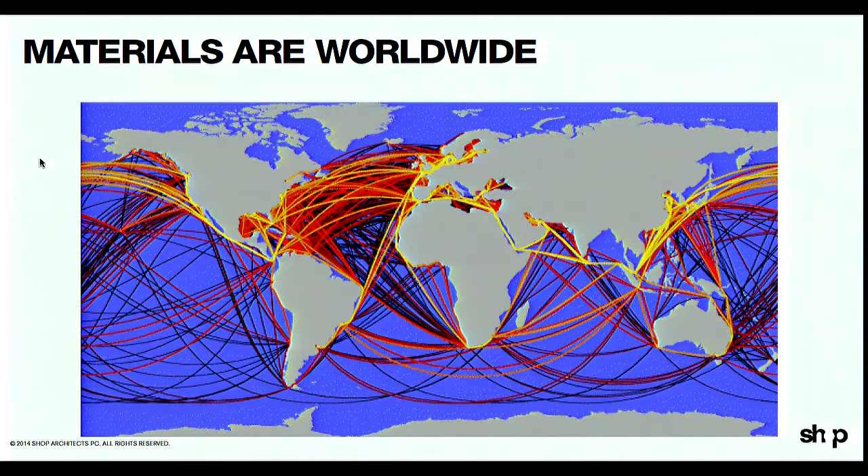This is a map of the shipping routes and frequencies around the world. We are hyper-connected through material processes around the world, but shipping is slow, expensive, and has a lot of emissions associated with it. At the same time, if we look at a map of our undersea cables that connect us via the World Wide Web, we're hyper-connected in this way too, and there's almost no cost associated with shipping a piece of information from New York to India.

So what does that allow us to do with those opportunities? It almost requires us, or begs us, to do more with less. How can we use information intelligently to prefabricate, to plan for doing unique installations, unique construction methodologies by tightly planning what we actually are shipping and tightly orchestrating what we are designing.

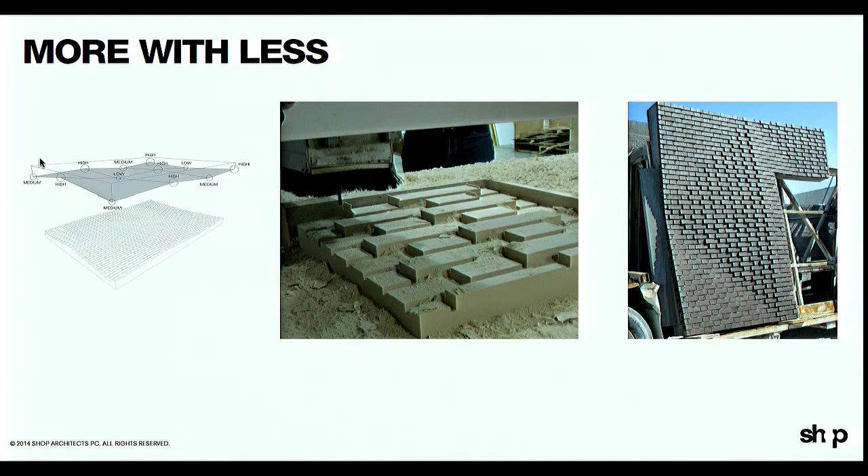This is a couple of images from a project we did in New York, where we looked at how we could come up with a 21st century application for traditional brick by using 3D modeling software to mill out forms, and then this is nothing but brick on a cement backup wall, and hopefully providing a visual interest, a new way of looking at traditional materials through this use of prefabrication. I'm going to touch briefly on the Barclays Center here in Brooklyn.

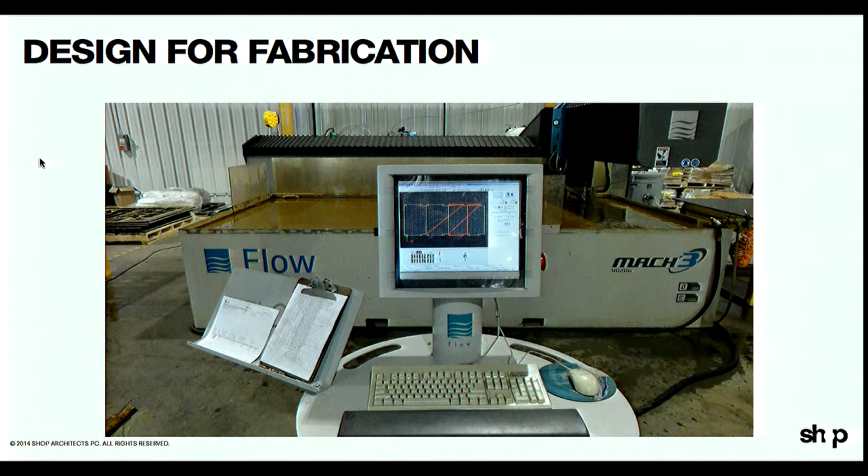Again, using this idea that moving information is inexpensive, moving prefabricated materials is expensive. This is an image of the CNC water jet in Indianapolis where panels were fabricated. This computer was programmed in our offices in Manhattan, and the information for every cut file was sent to Indianapolis. There were 12,000 unique panels on this project. Each one needed a different CNC cut file to cut it and then bend it.

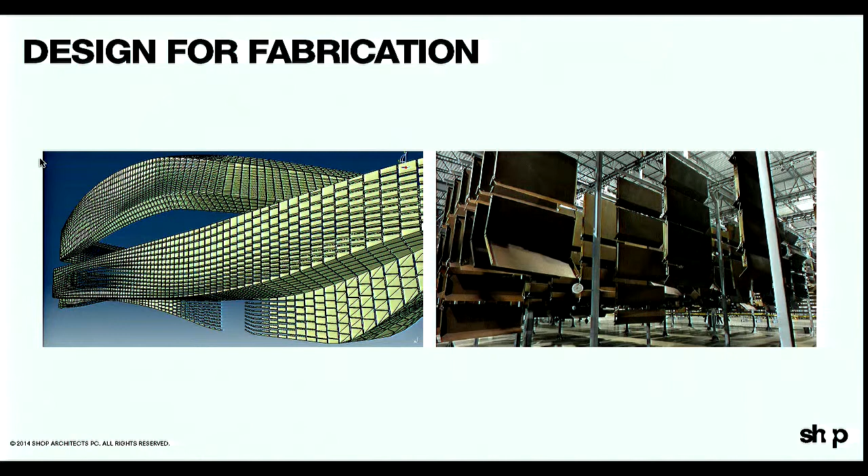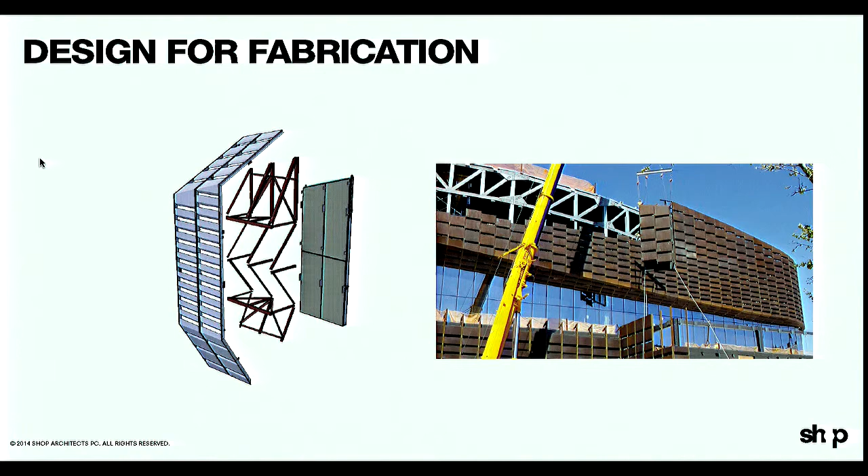And this is an image on the right of the panels being weathered in Indianapolis. The panels were then unitized to the enclosure system. And in this creation of 952 mega panels, we reached a really efficient unitization between enclosure and cladding and also shipment. And these were shipped to the site in Brooklyn and erected as you see there, coming up with a very unique visual interest moment.

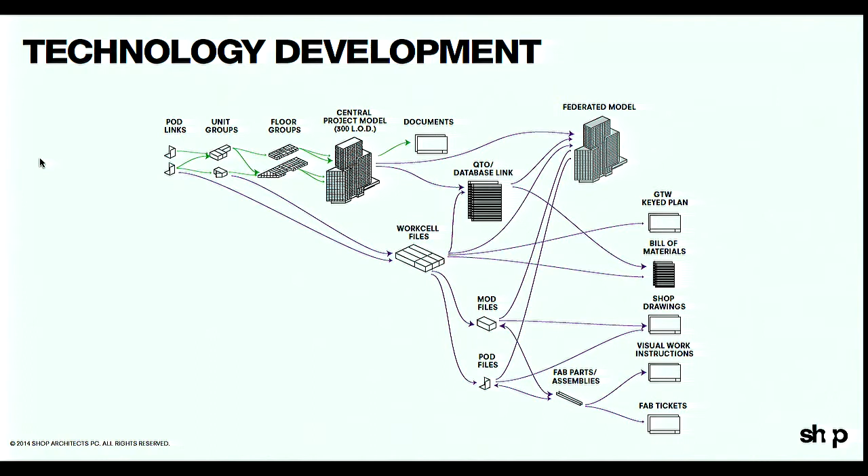So as Jeffrey introduced, there's a couple of drivers that are inherent to this system. Technology development: orchestrating information across multiple design teams, from the building information model to the instructions that the worker on the site actually uses, and how all that information is orchestrated is going through rapid technological development right now and is certainly impacting the way that we design and construct.

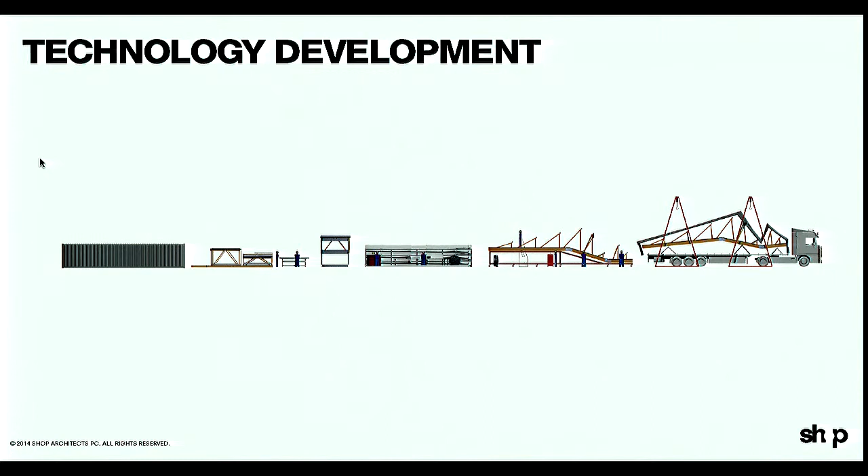At the same time that we're trying to coordinate massive amounts of information and plan it, we are also needing to coordinate material, the physical reality of what we're building. And if you are able to coordinate material, people, and information at the right time, you have a successful building project. If not, you have a lot of chaos and extended delays on your construction site. And what we're really talking about is building a very complex database of information that allows us to plan and coordinate this orchestra. And we've been working with technology companies to help innovate what this database is. This is an example of linking all different parts of the model to that information.

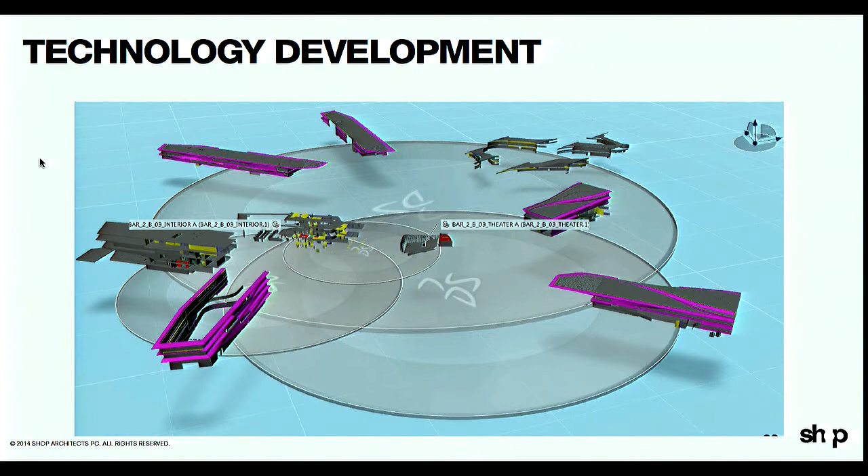But you can't have just technological advances without organizational advances as well. And very traditional to our industry is a hard divide between the design side and the construction side. It does not work like this integrated database that we're trying to drive to. It works as a barrier between them. So we need to take contractual issues and catch them up to the technology advances that we're making, and bring people together in the same way that we're trying to bring materials and information together.

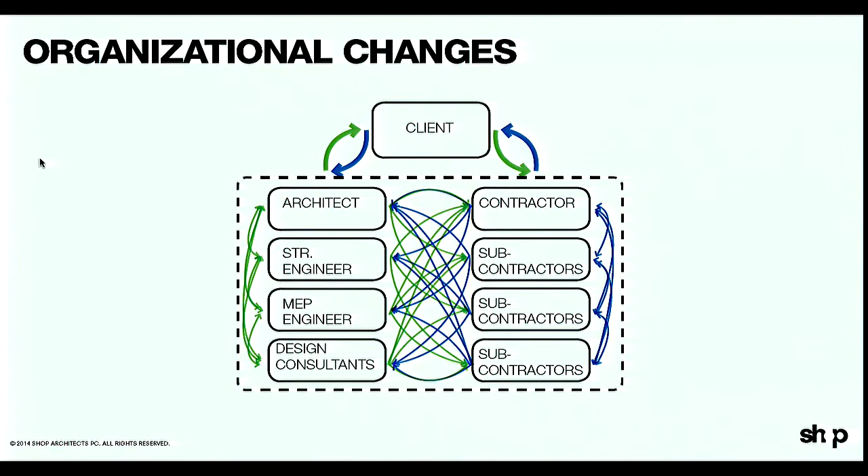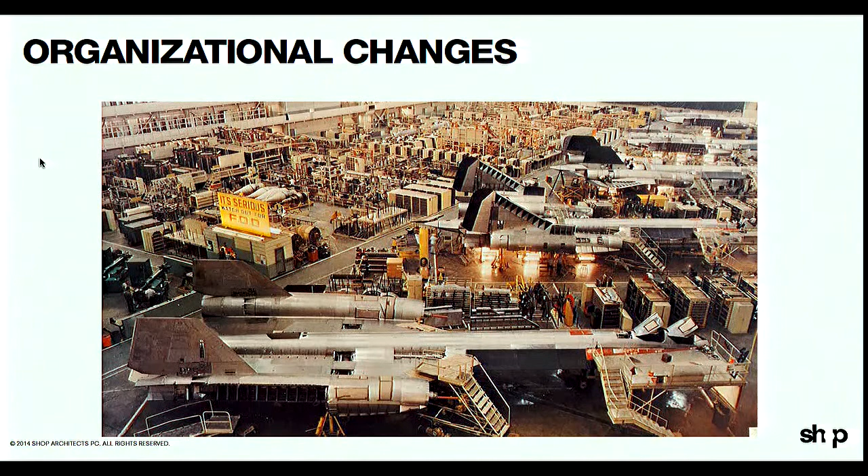One of our office's favorite examples of this is Skunk Works from Lockheed Martin, which was, we're going to put a cross-disciplinary team in a warehouse for 8 months, and they're going to redesign the jet engine. And if we can take lessons like that of putting people together in a room, and that was in the 50s, certainly we can do that today. And we're trying to, and I think this is putting cross-disciplinary teams in connected environments that link people around the world, but there's no replacement for getting people together in the same spot.

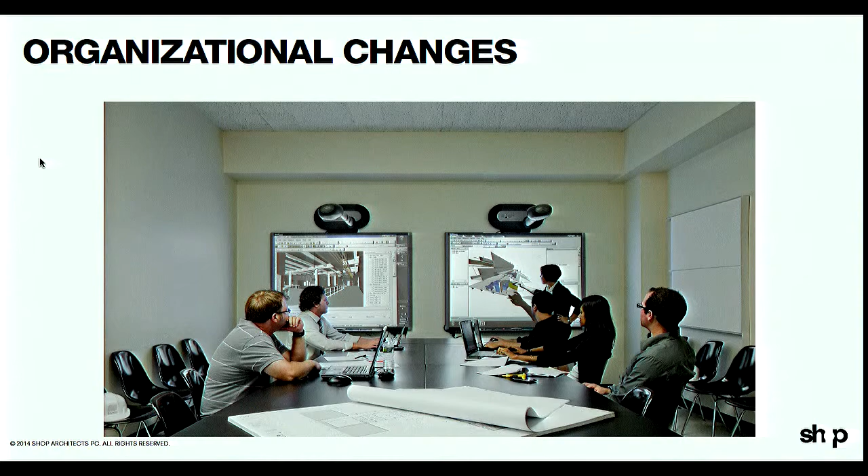This is an iRoom that we set up on a project to connect people together, and this is actually, to this conference, affecting where that perimeter of the site is, who goes in and out, what information goes in and out, and how that site interacts as part of not just a construction site, but an office.

Which leads us to operational changes about how we are producing our construction sites. I think you're going to see more and more prefabrication based on these macroeconomic forces, and also the technology development and the organizational changes. You're going to see more and more prefabrication. I mean, this is MEP pipe racks, which is very boring, but is radically changing what materials are delivered to our sites, and what the perimeter, if you will, of a construction site is.

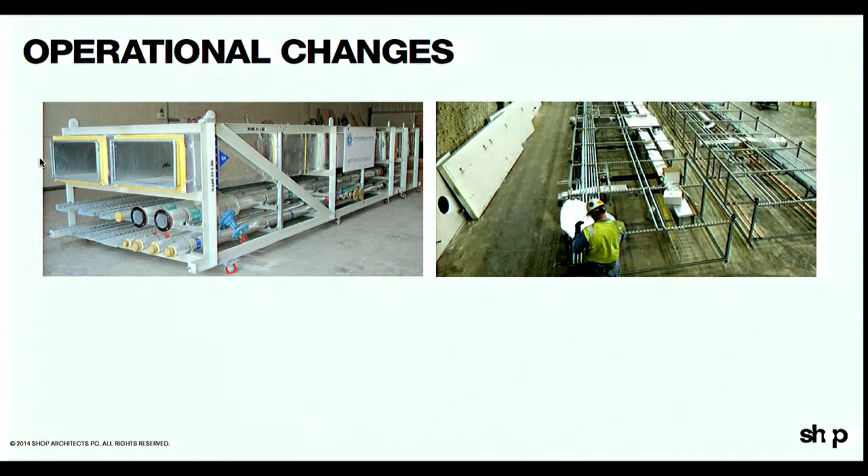So I think one of the advents that you're going to see more and more is what we're referring to as pop-up assembly sites, where on the periphery of major cities, you have light manufacturing that brings these worldwide shipping points together. It acts as the hub of the information and of the materials, and it prefabricates and organizes the materials before they're shipped to the site for erection. And through this, I think you're going to see what's inside the site continue to change.

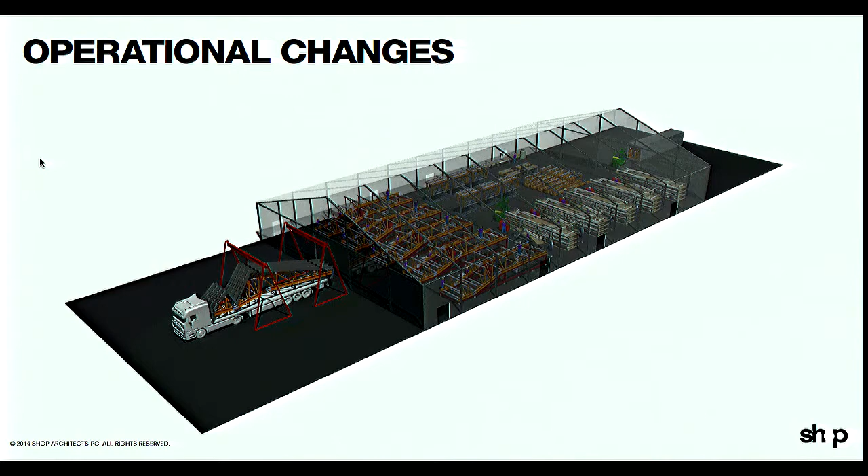Larger pieces are going to be delivered, but more sequenced, and the construction site will become more of an assembly center than a construction site. So with that, thank you very much.